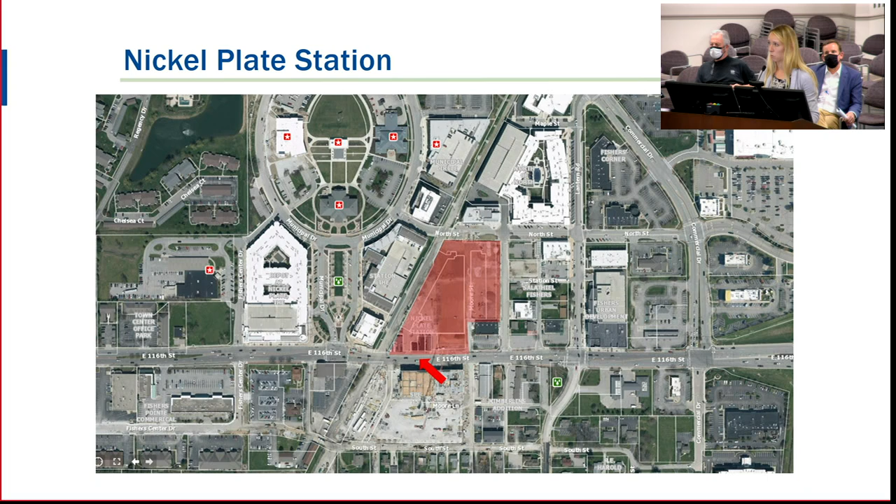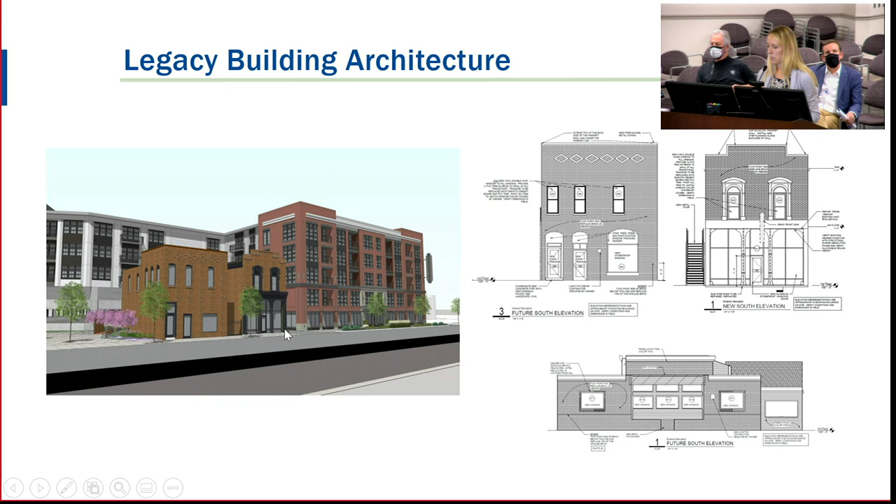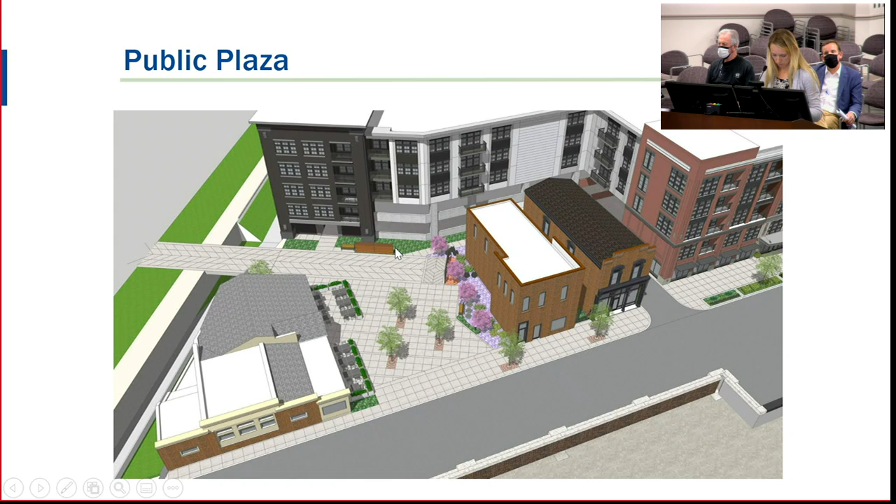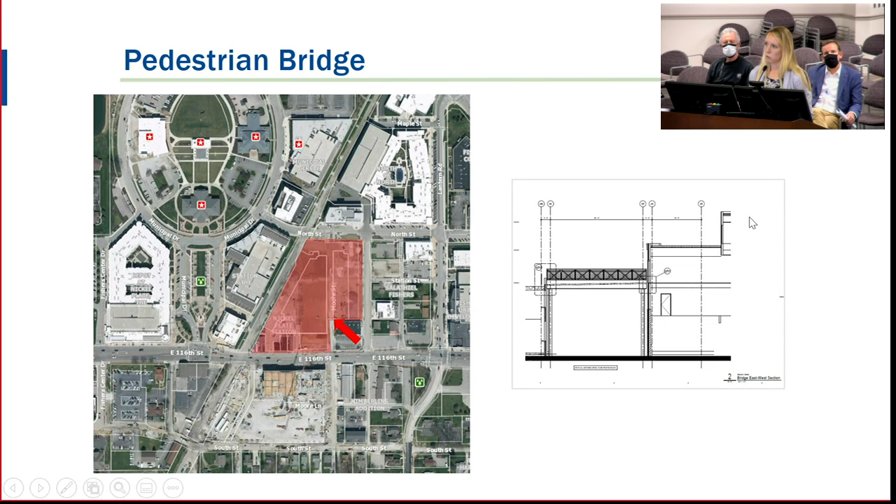This has been reviewed by both our engineering and fire department, and they are both okay with the clearance for this bridge.

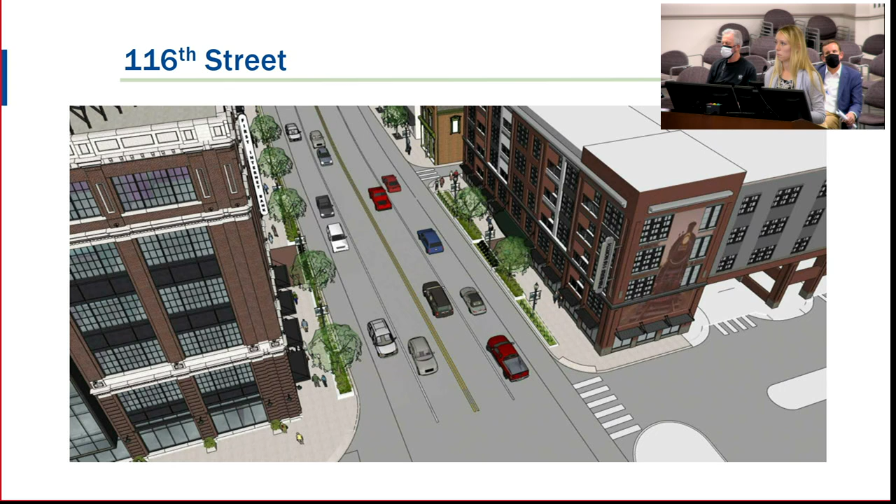And then with this revision, they are also requesting to allow for the initial awnings that were shown before back in 2019. At that time, the condition was made to add some architectural features along the front that incorporated this new modern architecture with the existing legacy buildings. One of the thoughts was with the look of the awnings. Since then, the awnings on the legacy buildings are proposed to be removed.

So they are now requesting to add these sunshade awnings instead of what was formerly approved, which was more of a fabric awning look to match the legacy buildings. Staff is okay with that request, but was going to leave it up to this board to provide suggestions and recommendations, since that was an initial commitment by this board initially. So that is all staff has.

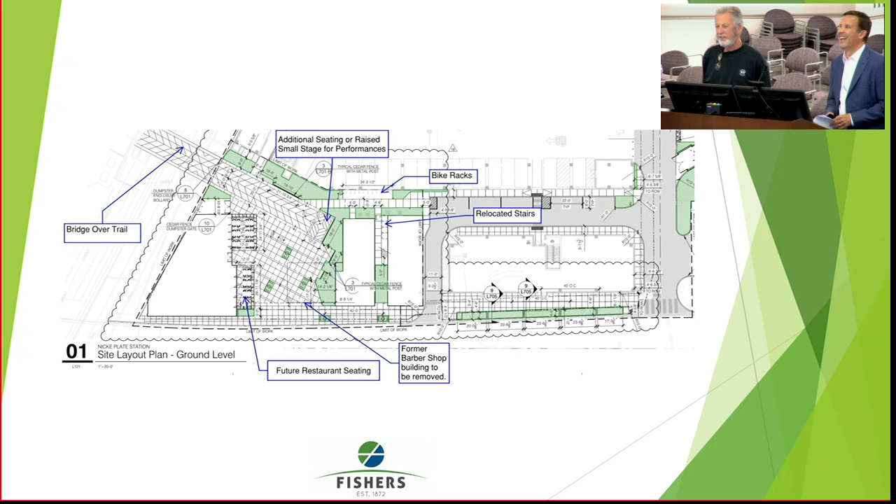That wasn't in our program to figure that out, but yeah, good point. I think that makes a lot of sense.

Okay, we'll spend a little bit of time here digging into some detail on the legacy building facades. So this is the former State Farm building, the furthest east of the two. As John just mentioned, that ability to move that stair from what was the back side of the building onto the side of the building, we think is a nice change.

Where obviously we have a new roof, a fair amount of brick replacement and tuck pointing happening. Most importantly, though, the front facade of the building will reinstall a full glass front. The iron, the metal storefront, the historic metal storefront will be repaired and repainted.

It's currently kind of a dark green color, and there wasn't a strong indication that that was of historical significance, so we're proposing a black color which ties better with the accent colors that go with the multifamily projects just behind it and next to it.

Yeah, and I think when we get further we have some more renderings that show exactly what we're proposing here.

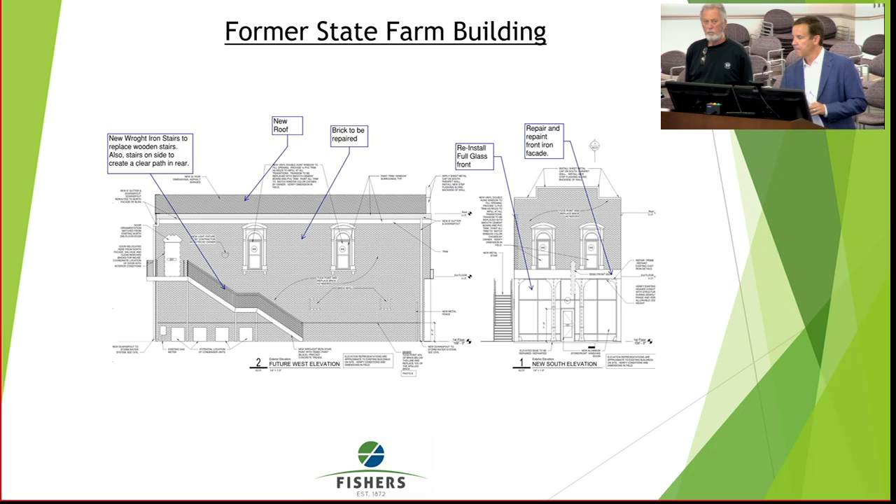Just a minor point, across the street at First Internet, their window system and storefronts are all black as well, so it kind of goes with that historic warehouse industrial look.

Then the former Vardigan building: primarily our charge was to secure the perimeter, the exterior shell of the buildings, and make sure that they're watertight. As Adam said, there's a lot of new roofing going on, patching of brick, new windows, obviously getting those all sealed up, some new or replacement doors, so that they're sound and ready for the marketplace.

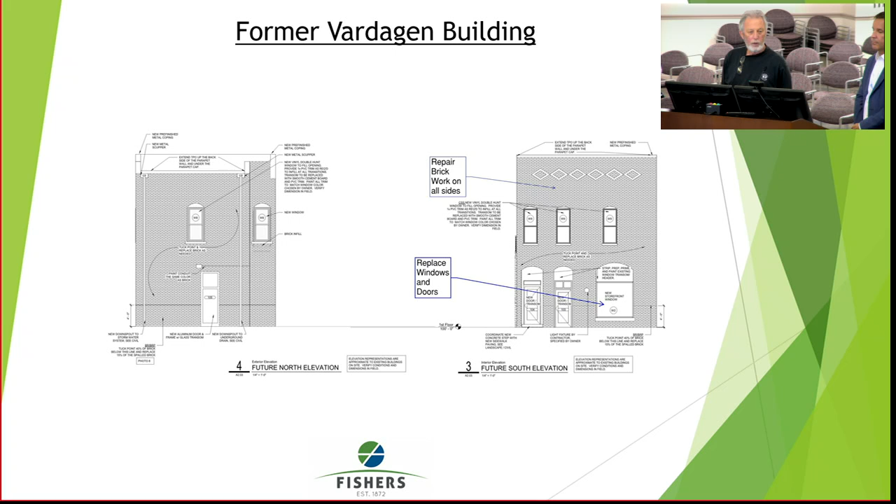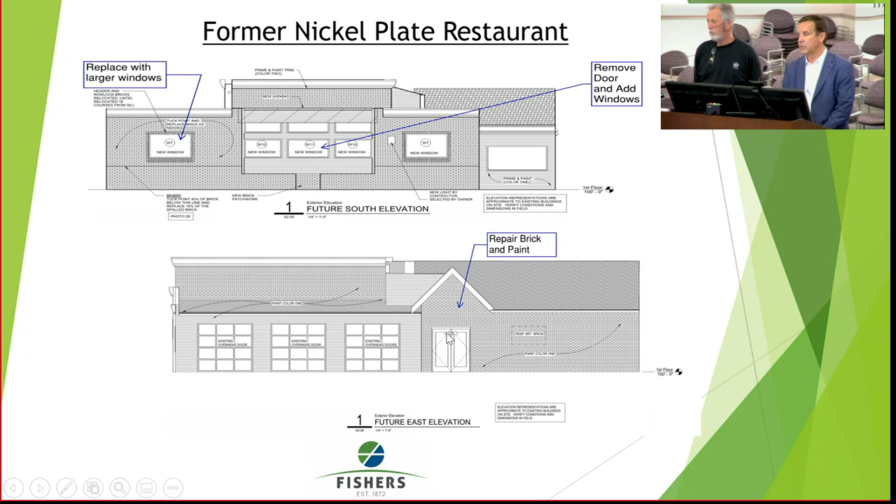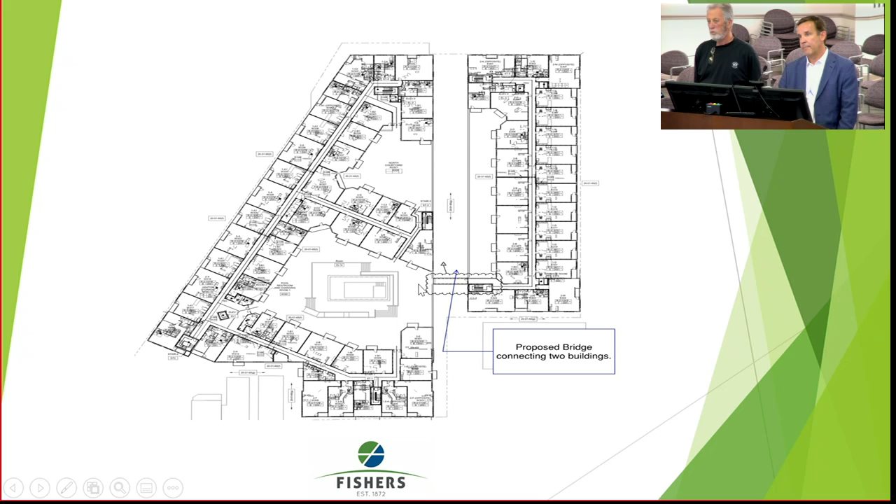The connection bridge, as Megan mentioned, we think it's a wise idea to connect our east building and our west building with a pedestrian bridge. It makes for a better product, a better resident experience, a safer experience for people crossing, and an easier experience for those with ADA to get from one building to the other. It comes directly from a public access stairwell in the east building and dumps right into one of the two courtyards, the pool courtyard on the west building. That's at the third floor, the plaza space and the bridge.

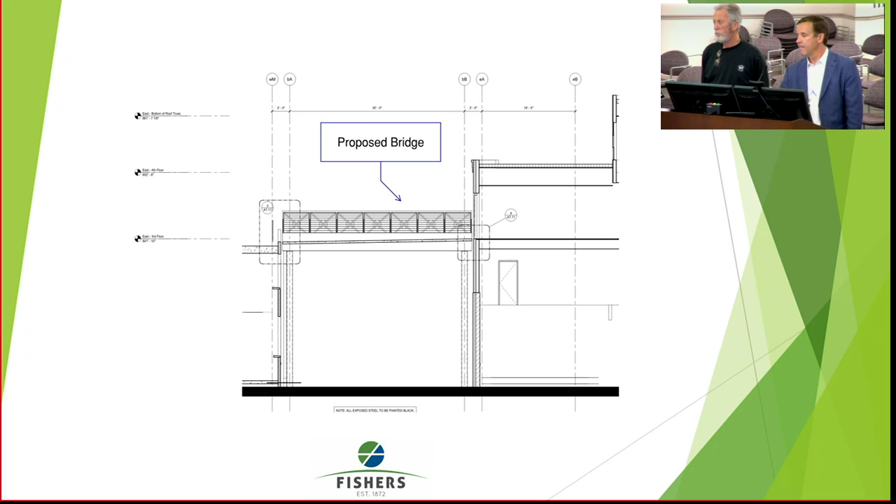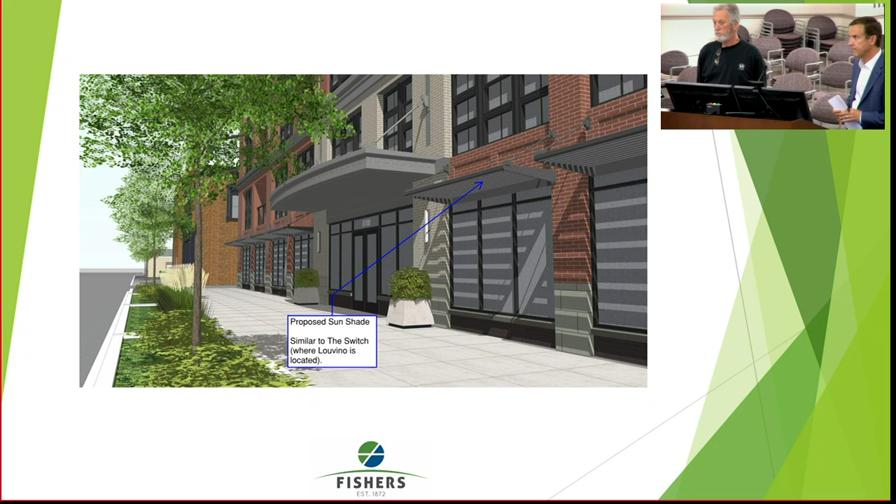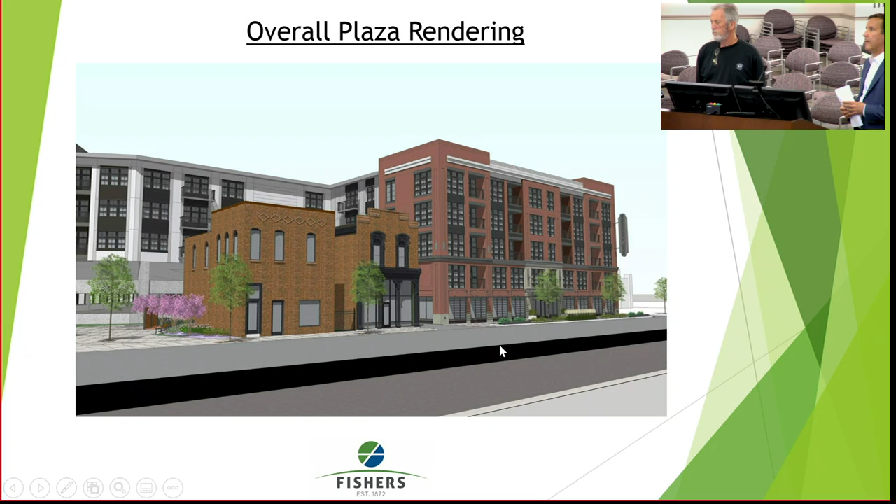You talk about the light here? Just on the facade. Yeah, right. Which light gray are you talking about? Either one of those grays back there. Okay, I think you could bring that into here, you know what I mean? It's just like that color scheme really isn't around there, unless it's across the street, I guess is what I'm saying.

No, it's not, and I think that's a good suggestion. Part of the challenge with trying to pick colors for a space that doesn't have an actual user yet is figuring out what makes sense. But we would like this to tie together, so we can make that adjustment. I think that's a good suggestion - it just kind of stands out a little bit based on everything else with the grays and the reds and the browns, and then you have this light cream color that came out of nowhere.

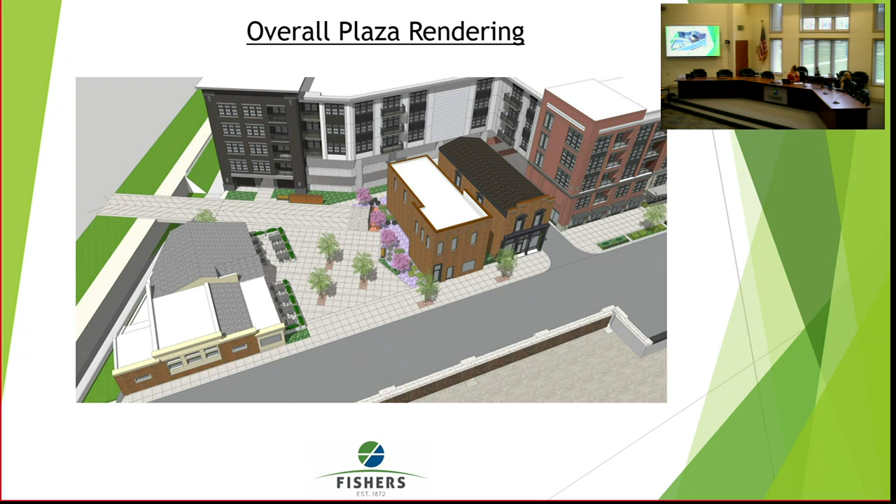And we keep talking legacy, right? I don't know if anyone outside of committees in the city really looks at the legacy buildings, and that we're appreciating it as a legacy, maybe finding some way to show the city of Fishers that we appreciate the history in these buildings, and that they are a legacy for us. So I think that might bring all of that together and honor the history that's there, whatever that history might be and however long it might have been. I know it's important to the city to see that.

Selena, do you have any further commentary? I'm shocked. Eugene, anything further you'd like to discuss today?

I've got one last question, and I don't see it in this particular rendering, but I think I saw it on another document. The current street lighting that's similar in pattern on 116th, that will remain in this plaza area, correct? There's like 3 or 4 light posts on the north side of 116th, those will remain, correct? Yes. What kind of lighting will we see within the actual plaza area?

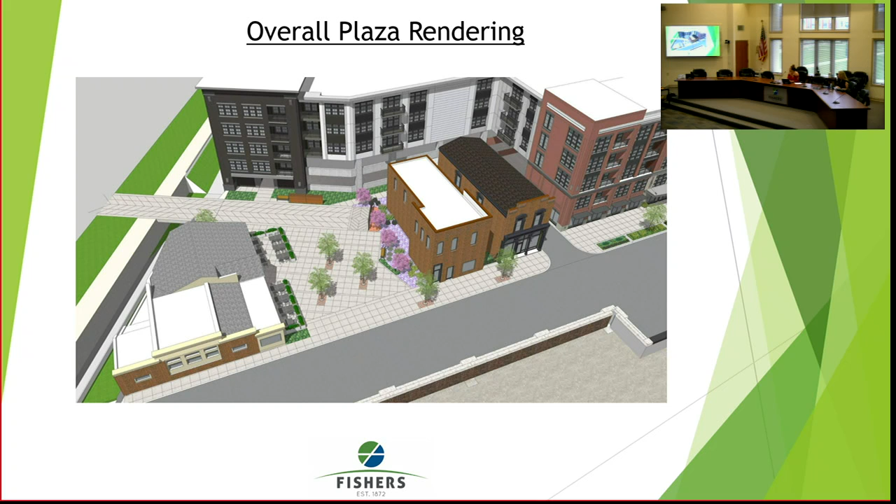Anything else to discuss this evening? I just want to note that Tony Bagato's last day was last Friday. With him taking a new job in the private sector, I've been named the director of our department. I'm also excited to announce that we have a new assistant director, Ross Hillary. We're really excited to have him in a leadership role as well. And we also have another new planner with our department, Jonah Butler, who's in the audience, so you'll probably be seeing his face more. Well, congratulations to you all, we look forward to working with you.